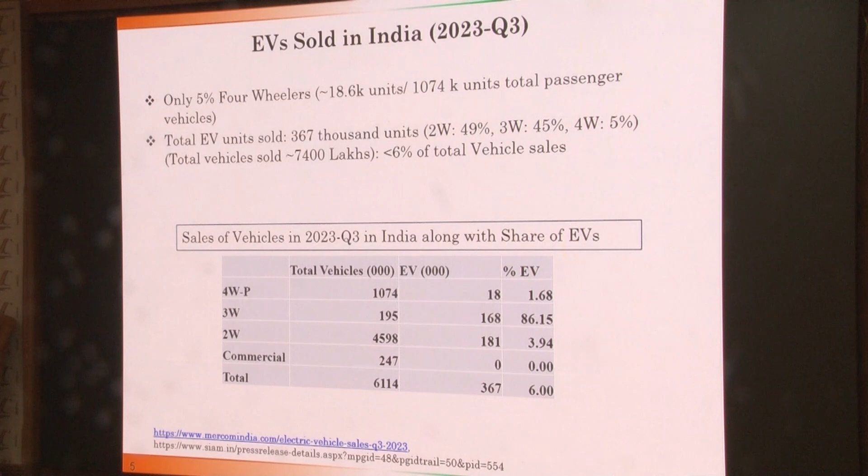So if we have to make some effort for reducing emissions through the transport sector, alternate fuels along with EVs are there. So even if there is not 100% availability of green hydrogen, if we are substituting by 10%, 30%, there is at least 30% reduction, so this should continue.

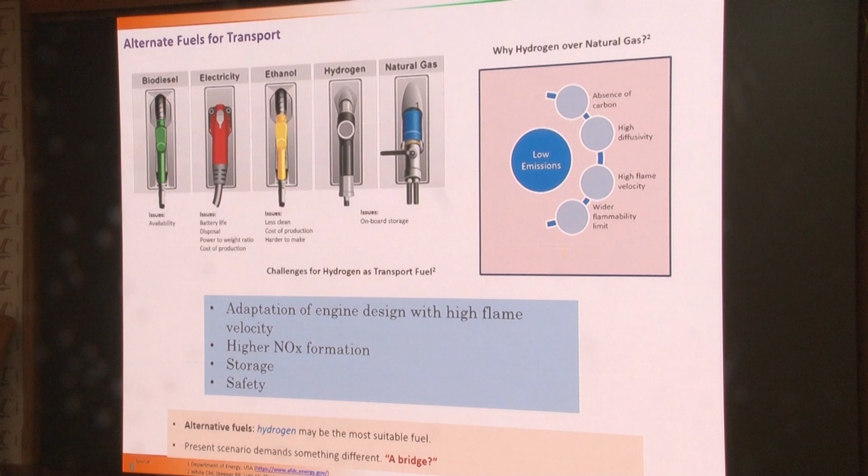With that objective, like in the past we have seen in India, due to a market-driven scenario, fuels like LPG and CNG were really very popular. Same way, if there is a national mission for hydrogen, and they are claiming a significant increase in hydrogen production will happen, even limited availability of hydrogen should be used and the process should continue.

Then we can think of this quantum jump, because nowadays on roads, IC engines are giving efficiency in the range of 15% to 20%. In the previous presentation we saw that 47% is achievable. And if there is a long range of flammability limit for hydrogen, then we can ensure that those higher efficiencies can be achieved even at part load conditions.

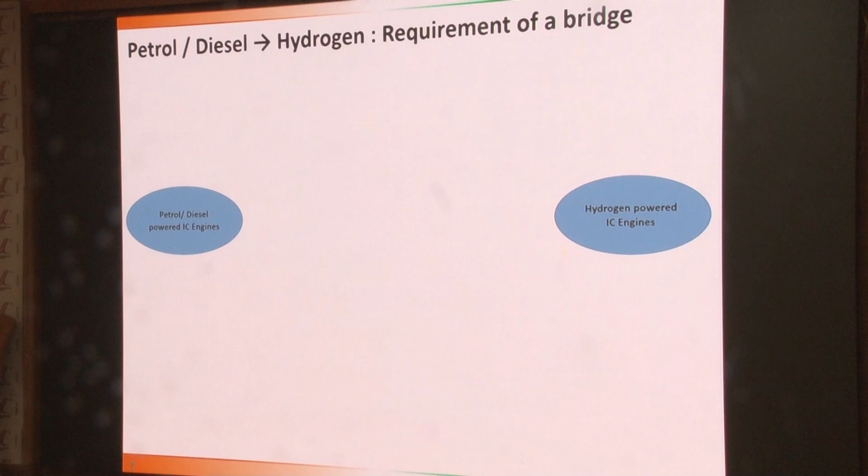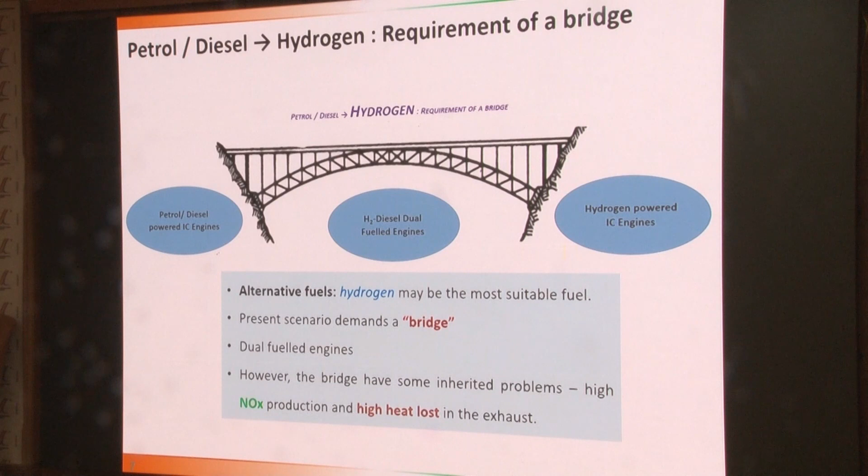Then even exhaust heat recovery has potential of about 2 to 3% improvement in efficiency, and if it is coming through this hydrogen route, exhaust heat recovery is first converted into onboard hydrogen production, and it can be put into the combustion chamber. So then it attempts to surpass those storage challenges. So along with engine optimization, this exhaust heat recovery by surpassing the storage can help out.

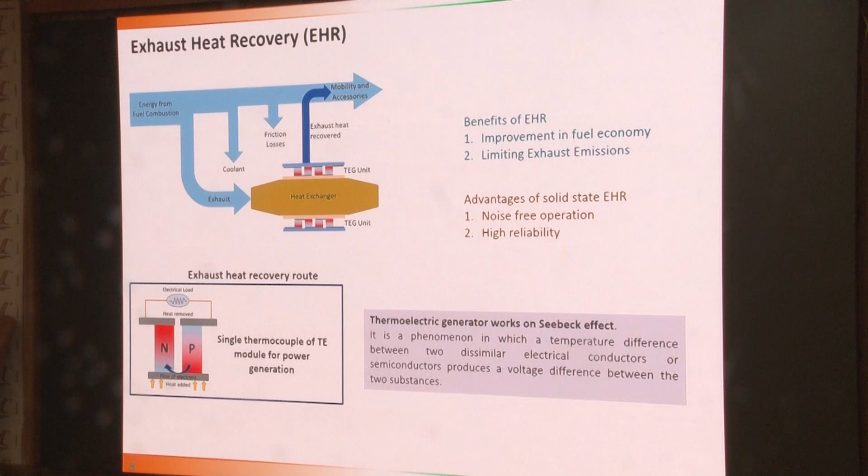With that objective, what results I will quickly present are related to the effect of up to 10%, 20%, 30% hydrogen energy substitution in a diesel engine. That has one direct advantage: we have the advantage of higher compression ratio here, so then efficiency numbers should be compared with the advantage of this higher compression ratio compared to the normal gasoline engine.

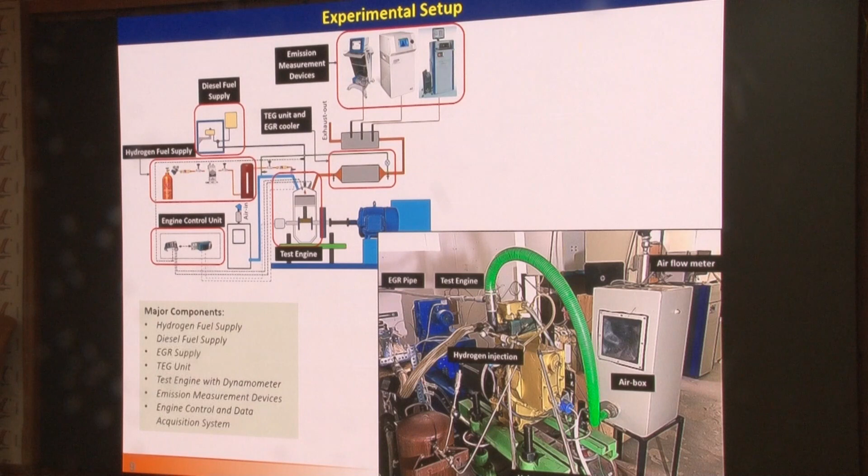But of course, because that engine is not designed for operation on hydrogen, there are some problems as well, and listing those problems will form the basis for further discussion. With that objective, I will quickly show some interesting and unsolved results: up to 30% hydrogen energy share along with 10% EGR were used, and how it affected engine performance and emissions along with noise and vibration characteristics, that I want to highlight.

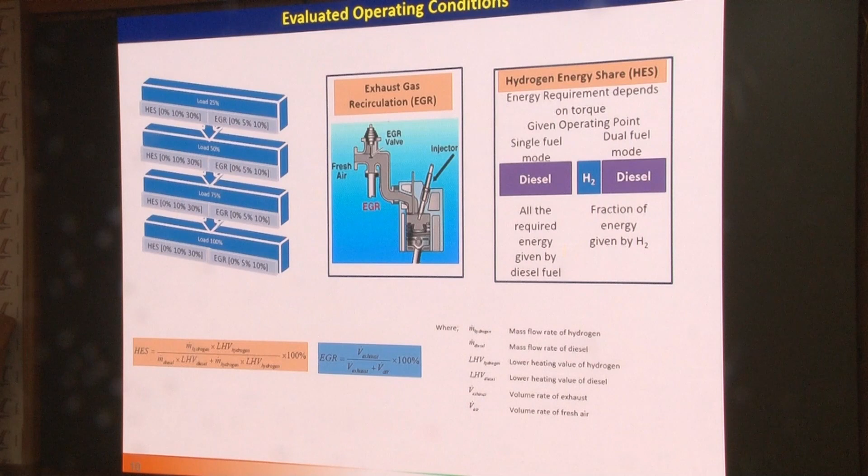As in the previous presentation, we saw that gas-gas mixing is a challenge. So even in the diesel engine, when we go for up to 30% hydrogen intake, it shows that pressure rise is delayed and heat release rate becomes lower. So all this indicates that though diffusivity of hydrogen is higher, in the conventional diesel engine there are huge challenges to get even a proper mixture, because there is a tendency of stratification in the gas-gas phase.

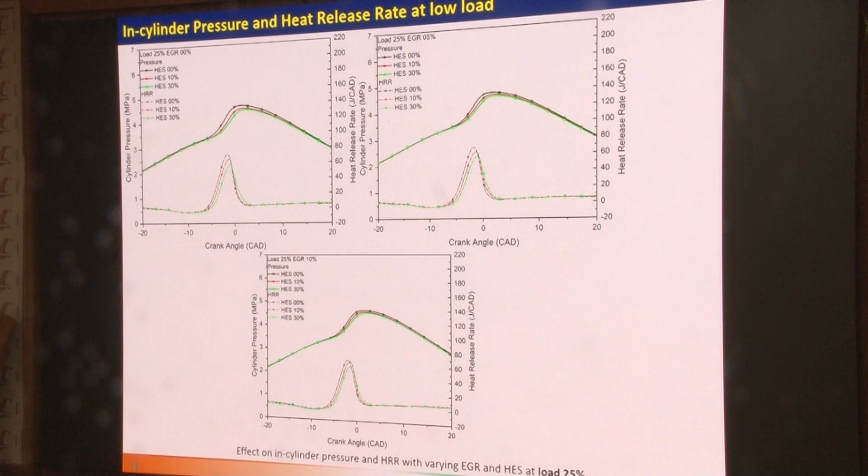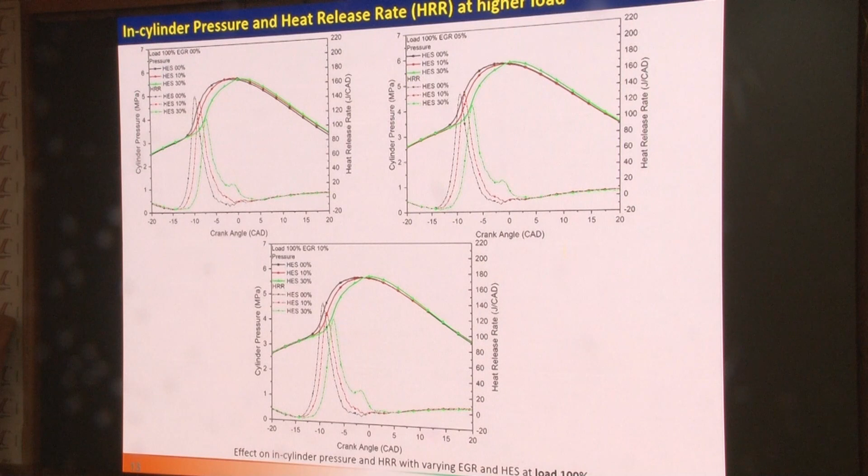At lower loads, at 25%, those differences are there, but they are pronounced even at the 100% load condition in that particular engine. So then how do they affect the combustion phasing and peak pressure?

It appears that these two effects, this hydrogen addition, it tries to compensate for the loss in the peak pressure, which is caused by some amount of the EGR. But this EGR and hydrogen were simultaneously studied just to see how much that particular engine is deviating in terms of emissions and performance.

From here, we can simply have this small conclusion that while we are going to have some EGR, it is reducing the peak pressure, but substitution of some of the diesel with hydrogen is able to compensate that. So at least there is not much difference in peak pressure and combustion phasing, represented by the location of the peak pressure.

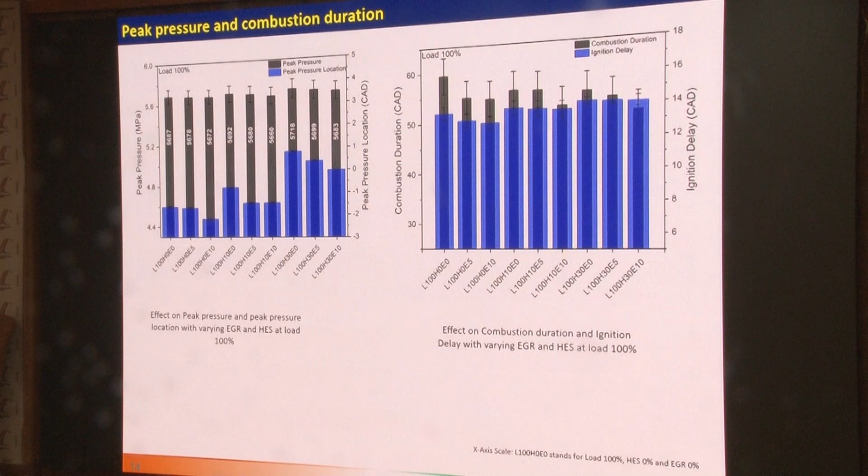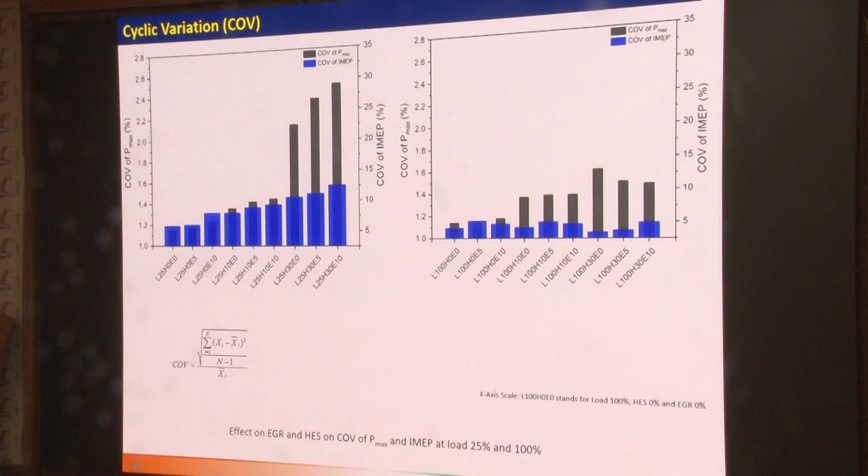But then coming to cycle variability, there is a significant increase in the cycle to cycle variability while we are operating that engine at lower load, as indicated by this COV of Pmax and IMEP. But those numbers are in acceptable limit while we are moving to the higher load, the graph indicated on the right.

I will skip this. So then coming to how this stratification of the combustion and higher laminar velocity of the hydrogen contributes to increase in the engine noise and vibration. This was measured by a simple accelerometer test, separating out the noise and vibration in the motoring condition and in the fired condition.

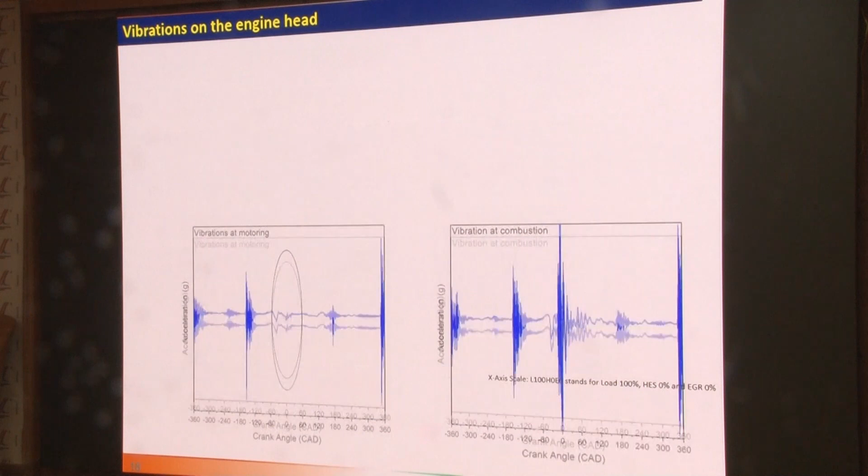Here we can see that the conditions represented on the farmost right. So there, while we are going up to 30% hydrogen energy substitution, this higher laminar velocity of the hydrogen means the rate of heat release is not smoothly transferring to the useful pressure rise. That is causing the harmful effect of increasing the vibrations and the combustion noise increment.

But if that effect can be suitably utilized by tuning the engine, say piston speed with respect to the flame speed of this different fuel, hydrogen, then I think with those improvements we have scope for even surpassing this 47% limit.

So in response to the question, I would like to say that hydrogen is an altogether very different fuel. Whatsoever knowledge we have gained for gasoline and diesel, and whatsoever capabilities we have developed for engine research and diagnostics, they need to be used to tap this higher flame speed so that we can even challenge the efficiency promised by

fuel cell engines. And yesterday from the French delegation, I heard someone is working on that perspective, like they take this fuel cell as a benchmark and claim that we should be pushing the engine design so that even IC engines should come into competition with that.

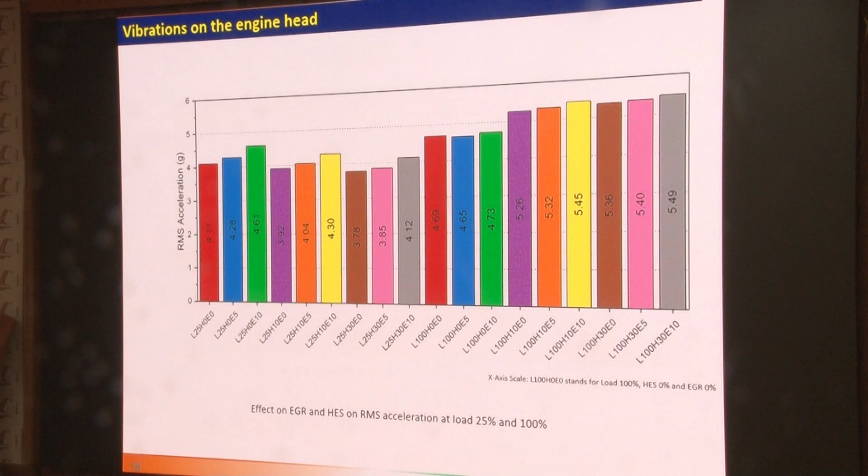So then what appears as a problem is mismatch in the design of the engine for a slower fuel, and so proper stratification and some other changes in the design, we may even challenge that.

So then usual issues, of course, if there is a gaseous fuel in the engine design for some other purpose, this volumetric efficiency reduces, but hydrogen doesn't need as much surplus oxygen as what is needed for diesel, so that's why that was not a big problem.

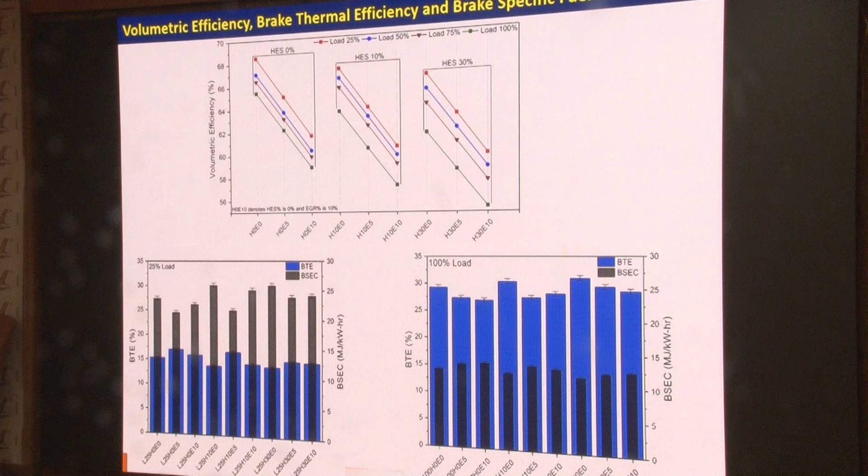So here if we see these efficiency numbers, at least we can say hydrogen was able to catch up even up to 30% substitution with the corresponding diesel efficiencies.

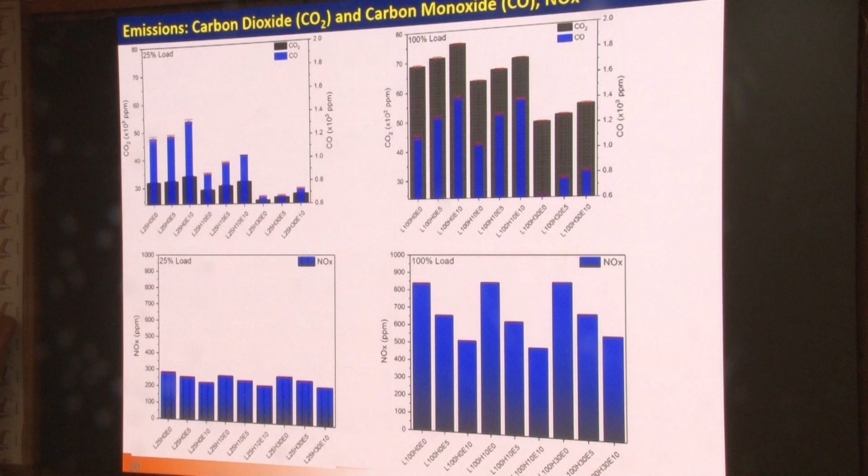So those efficiency numbers, but missing carbon content, of course, resulted in CO2 emission reduction. So maybe it is better to see what was the overall effect.

With this proper tuning of the EGR, even this problem of increase in NOx was not there. So NOx reduced by 35% compared to the engine where only diesel is fueled without EGR, in the situation where there is EGR plus 30% hydrogen, and then there is a reduction in other pollutants.

And just to give context to these numbers, we are substituting up to 30% hydrogen. The best optimized condition is to have gains more than 30% reduction, but because that engine was not optimized for hydrogen, even in crude engines, partial substitution can achieve what these numbers are showing.

So one non-regulated pollutant, AHC, that reported some increase, so that is a cause of concern while thinking of this partial substitution.

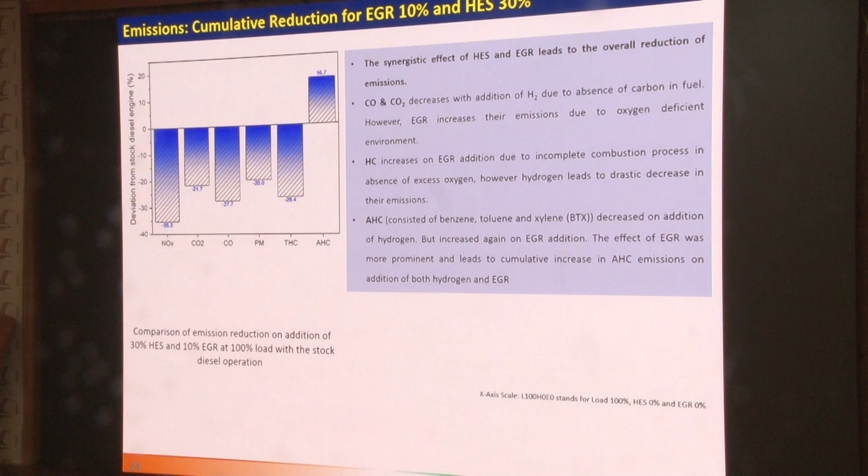So then coming to summary, as an intermittent strategy, where availability is not there and there are associated challenges of storage and range anxiety, and if something like decentralized hydrogen generation through biological routes and other things picks up, we should have even intermittent strategies to go for this partial substitution.

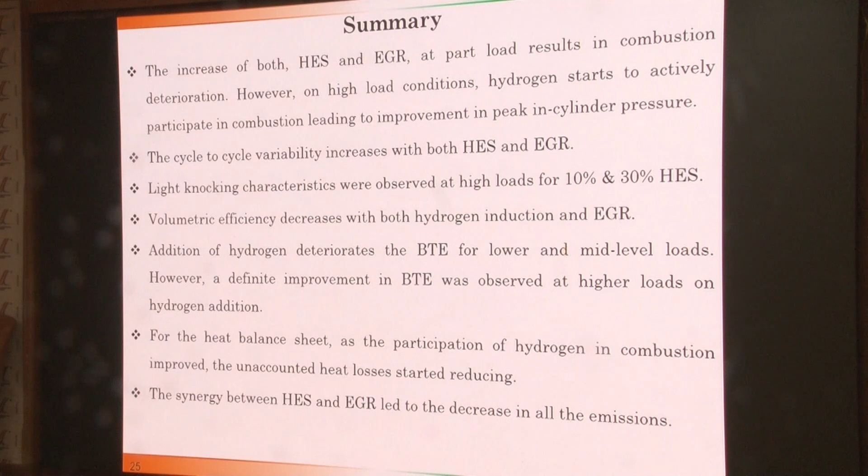Maybe 1 or 2 minutes I would like to spend on the road ahead or future perspectives. I see that we have gained a lot of knowledge in 150 years of engine design, and now with these optical diagnostic techniques, we are able to see the near-wall combustion effects. So it is possible to challenge what the efficiency could be for these fuels by going really lean.

Of course, the volume occupied by the engine for these conditions will be much bigger than we are currently thinking. But for large vehicles like trucks and marine applications, I think increasing the size, say even double, or having large scale turbocharging, so that we can operate really lean. We are also thinking to challenge the irreversibilities by even considering flameless combustion, so that there is not much stratification inside the combustion chamber, so even the efficiencies should be targeted in that higher range.

This higher laminar velocity should be taken as an advantage, so that the thinking for part load operation should be given to some really flexible control system, and it can be as radical as, in a multi-cylinder engine, some cylinders can even be put in off mode so that we are near the most optimized condition. So with that, I will stop, and maybe take some questions.

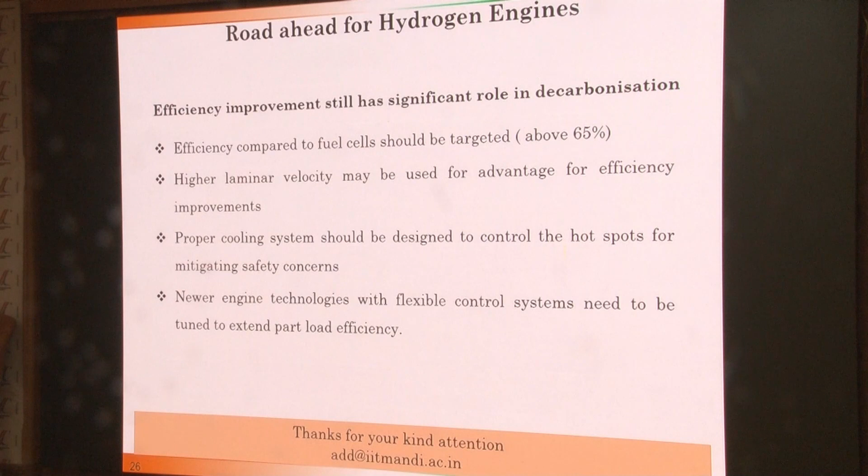Thank you for the presentation. Simple question: was there a limit to going for higher hydrogen content? Because you increased up to 30%, so was it not possible to go for 50, for example? It was limited by my experimental capabilities and resources to modify the engine.

So the purpose was simply to see, in an unmodified engine, what can be tolerated. As a retrofit, without changing the engine. And for retrofitting and advancement capabilities, that was already presented in a previous session.

A small query: you mentioned that AHC increases. What's the underlying reason identified for this? Because it is not supposed to be increasing with hydrogen. So, one thing, this study was not capable of giving any insight into the mechanism of how this small amount of hydrogen and diesel fuel is interacting. So I don't think I am in a position to comment on the actual mechanism.

Is the cause identified in literature somewhere? In literature, there are not many studies on this, on putting diesel along with hydrogen, because in some way it is also objectionable to put one comparatively clean fuel with a bad fuel, but for partial substitution and partial gains, that strategy is useful. Maybe there is some localized region where there is increased interaction between the diesel aromatic content and the hydrogen reaction, but that may just be an indicator, not an exact answer.